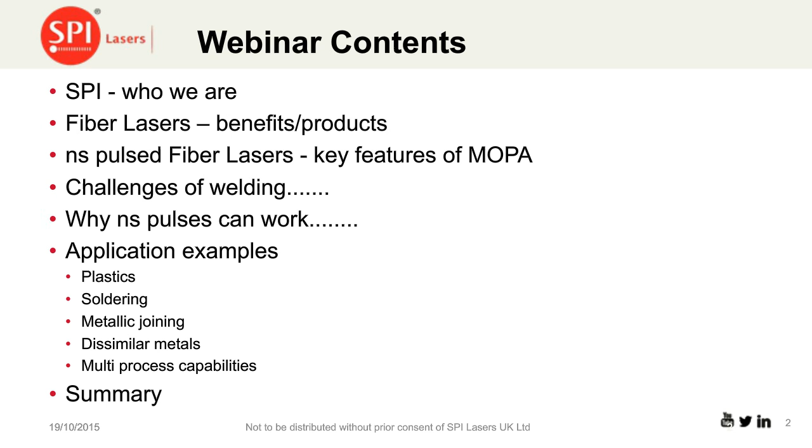And finally, we'll summarize the topic areas. A very quick summary of who we are: SPI Lasers is a manufacturer of fiber lasers based in the UK, and we basically make our own fiber. We're pretty much vertically integrated in most regards, and we have a global service and sales presence. We're very much involved in macro, micro, and marking applications, and pride ourselves on our applications know-how and expertise.

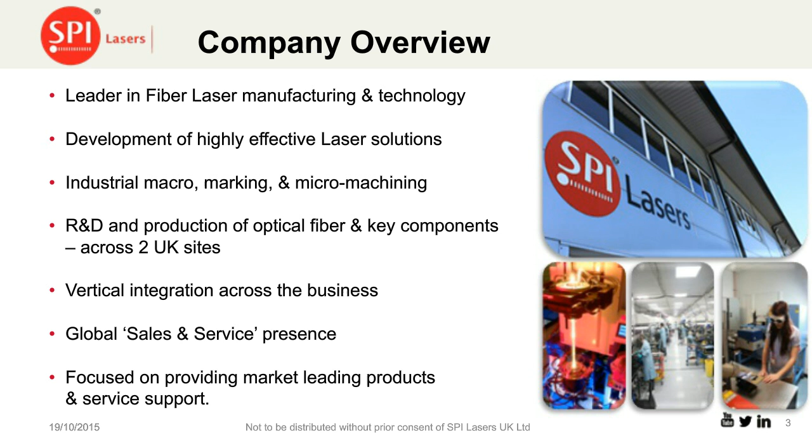In terms of our company history, just to put things into perspective, we are quite a relatively young company, formed effectively in 1999. We were originally a telecoms company that refocused into the industrial laser arena and decided to make fiber lasers just over 10 years ago, about 13 years ago. We were acquired by Trumpf in 2008, but run autonomously and independently from Trumpf.

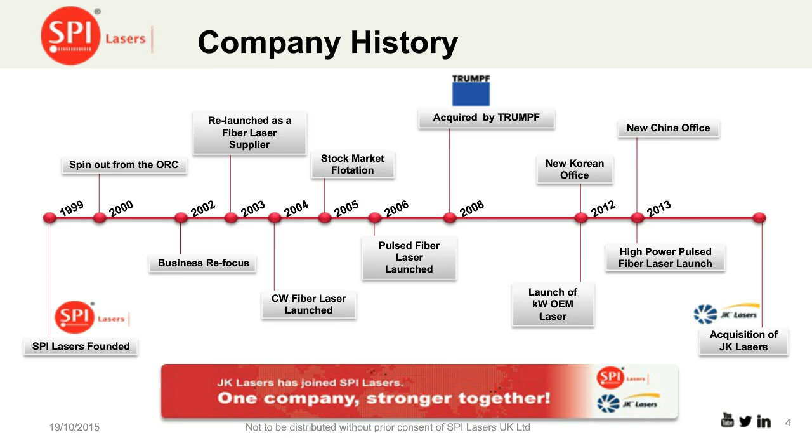More recently, we have acquired JK Lasers, that is now part of the SPI family. In terms of products, on the left here you'll see our pulsed fiber G4 products. We have then a whole host of CW products from 200 watts up to about 4 kilowatts, and those are the kinds of lasers that are more commonly known for their welding applications.

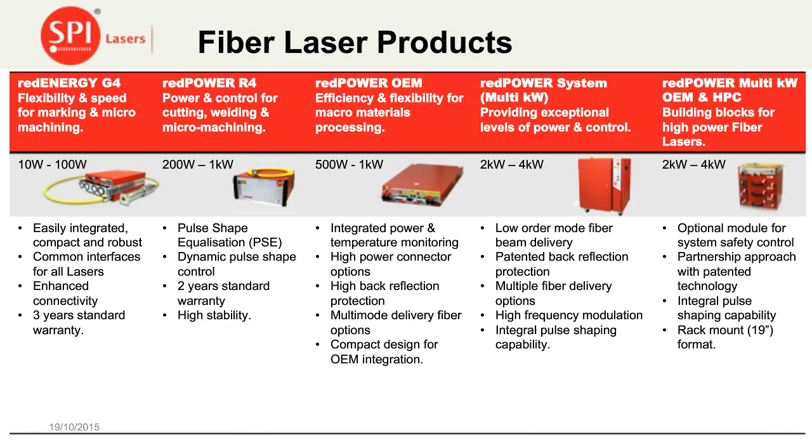So, I guess that's the kind of preamble, just to give you a bit of flavor for who we are. And now on to the bulk, in terms of joining materials. Basically, joining of materials is fundamental to manufacturing. It is one of the key processes that enables us to make things. And in fact, if we think about it, joining metallic materials is basically quite an old technology.

Welding dates back to 1885, with basically the invention of the electric arc. Before that, it was all forging, but that was when true welding basically came onto the scene. Key to this was effectively the development of local heating capability, and with that, the electric arc. I think it was Benardos and Olszewski, if I recall from my metallurgical background.

But the advent of laser technology in the 1960s produced effectively the perfect heat source. And that is what lasers are. Lasers are a very controllable heat source, a focusable heat source that you can turn on and off at will, and direct to the point of use. And that's what makes them so useful for a whole host of materials processing applications.

But also, more importantly, for the joining of materials, here we're talking about the importance of being able to generate high intensities. That's basically the high energy and high watts per square centimeter, high energy densities that are required to melt materials. We require high levels of stability because we basically want to have consistency in joints in the welding process. And also the controllability, being able to basically switch on and off at will.

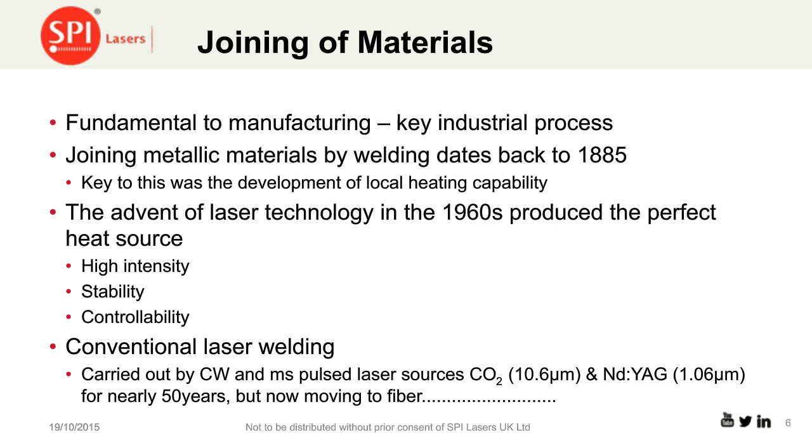In terms of the types of lasers being used, the basic type of laser is a CW laser, or continuous wave laser, where basically laser is measured by the power. Here you can actually see the top graph that shows that you get a stable output over time, and you can turn that on and off by modulation. So you can actually turn the laser on and off very rapidly, very controllably, to give energy to the workpiece at the point and time that you want.

More recently and more interestingly, perhaps the QCW type lasers, where these lasers are able to produce, for example, millisecond pulses with higher peak powers at reduced average powers than their continuous duty operation. So basically this gives us the ability to overcome material thresholds and punch in larger amounts of energy to create molten or larger molten pools that then resolidify to form pulsed type welds.

In some respects, some of the shorter pulse lasers are similar to that, but in fact what we see is even higher levels of peak powers with lower average powers. And that basically causes us a few challenges, because really we need to balance those out in order to be able to weld.

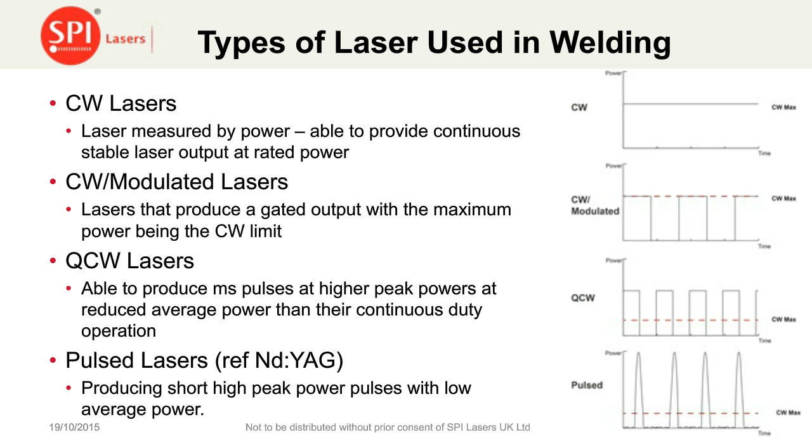So why fiber? Why is the fiber revolution rolling over the industrial landscape in terms of materials processing and welding? Well, it basically emits very close to the Nd:YAG or solid state wavelength at 1 micron, which is ideally suited to absorption by metallic materials.

We're able to tailor beam sources to generate high brightness or flat beam profiles through fiber and mode selection, so it basically gives you a lot of flexibility. These lasers offer high wall plug efficiency, reducing electrical and cooling requirements, and the complexity of integration.

So they're relatively easy to integrate into systems for generating industrial processes. They're sealed, flexible, require minimal space. There's very few internal free optics. It's all one piece effectively.

And so they are very adaptable in being able to deliver the energy to the workpiece, particularly through fiber delivery. And they offer the best stability in power, temporal beam response, and spatial profile mode for industrial lasers.

And I guess, if you follow the industrial revolution effectively, you'll see that the fiber lasers are the new kids on the block, well, 10 years now, but have really commanded a leading market position and adoption within industrial processes.

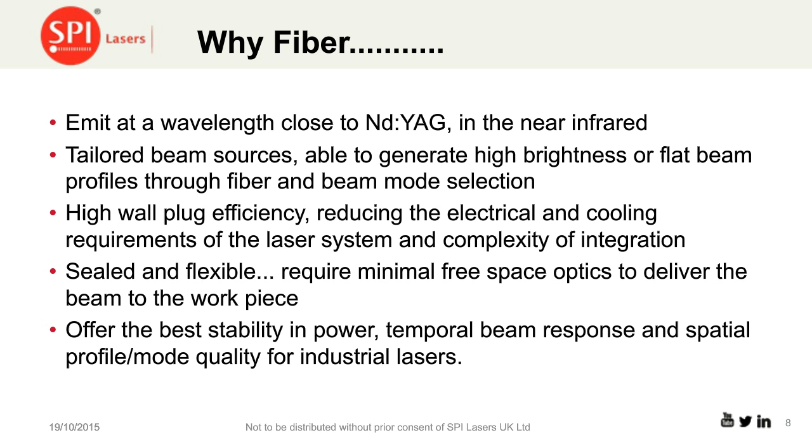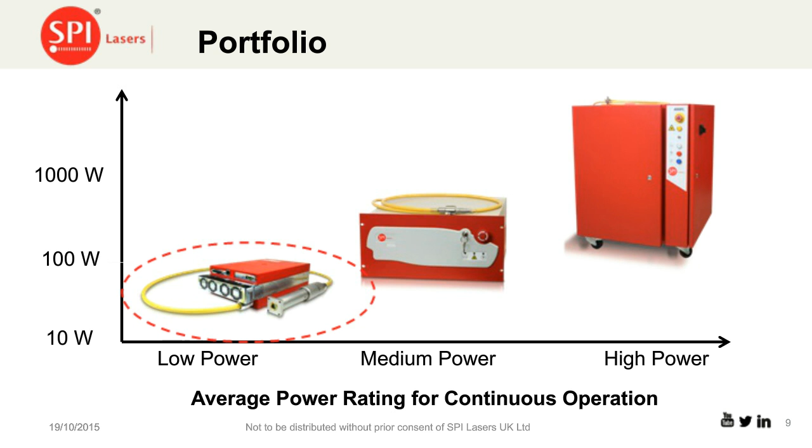And in terms of the challenges that we have for joining, the most important thing is the ability to control heat input, and I think that's why the lasers themselves are ideally suited. Then we have the questions of price versus performance.

Some of the high power laser sources are quite pricey. One of the things that fiber laser technology has done over the years is address the cost per watt, which is continuously coming down and enabling more opportunities to take on fiber laser or laser sources for materials processing and welding applications. Quality and repeatability, flexibility, and one of the challenges I specifically want to talk about is the joining of dissimilar metals.

And really what we want to address now is how these pulse laser sources can address those things above.

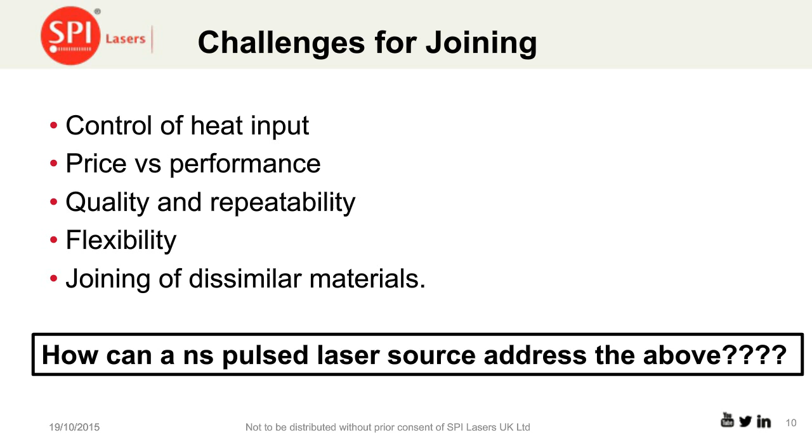In terms of the materials that we want to talk about, it's basically limited to relatively thin sections, less than 1 millimeter. With a 100-watt laser, there's some expectations that we need to set here, but we can do quite a lot of stuff with these kind of lasers.

And what I'd like to do is focus on lap and spot welding. We'll deal with stainless steel and copper in terms of just basic welding processes, and then explore the ability of these nanosecond lasers to weld bright metals and various combinations.

And interestingly here you can actually see in the picture lots of different materials, and all of those are basically welded to stainless steel buttons.

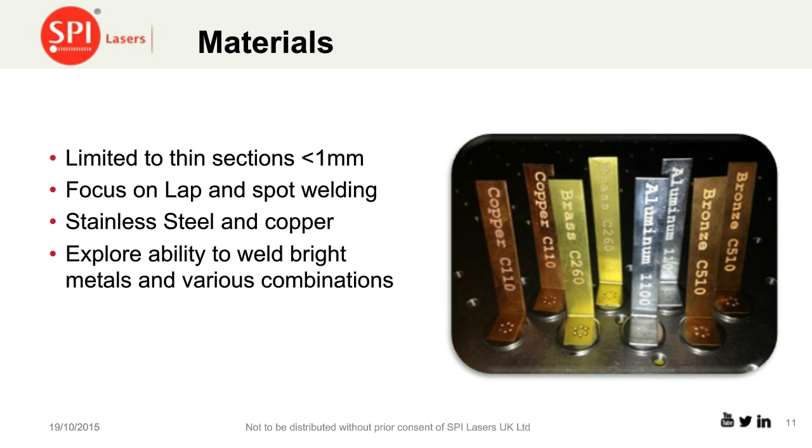In terms of these nanosecond pulse fiber lasers, they're little small things. They're like the size of a shoebox, no bigger. They're highly efficient, air-cooled, compact, monolithic in design, which basically means that it's one piece of glass.

So there's nothing to adjust, nothing to clean, which means they have a long, uninterrupted service life with no maintenance, no alignment, no cooling issues. It's basically fit and forget technology.

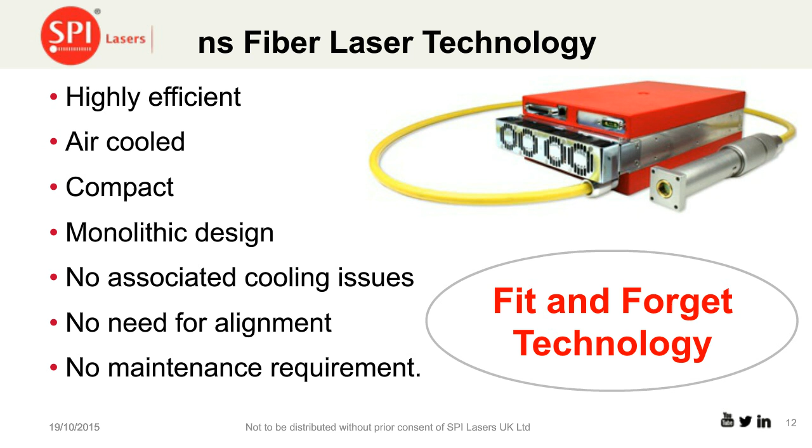Which is so different to many years ago with solid state technology or CO2s, where you almost needed a scientist to keep the lasers running, and also you needed someone skilled in maintenance to make sure that the performance was maintained. Those days are past. I think the advent of fiber lasers means that the reliability and repeatability is second to none now.

Many people may be aware of short pulse lasers and how they're generated. Most conventional pulse lasers use what is called a Q-switch, which is an energy storage device or technique that basically then discharges the energy available from the laser.

The lasers that we generate are based on a MOPA design, a master oscillator power amplifier design, that uses a semiconductor seed to actually generate the pulse, but we then amplify through a fiber train. This gives us some advantages and benefits in giving us greater control of capabilities of the generated pulses.

We have a characteristic fast rise, which is different to the Q-switch designs, which tend to be normal in terms of distribution. And that's basically good, as it's quick in overcoming processing thresholds.

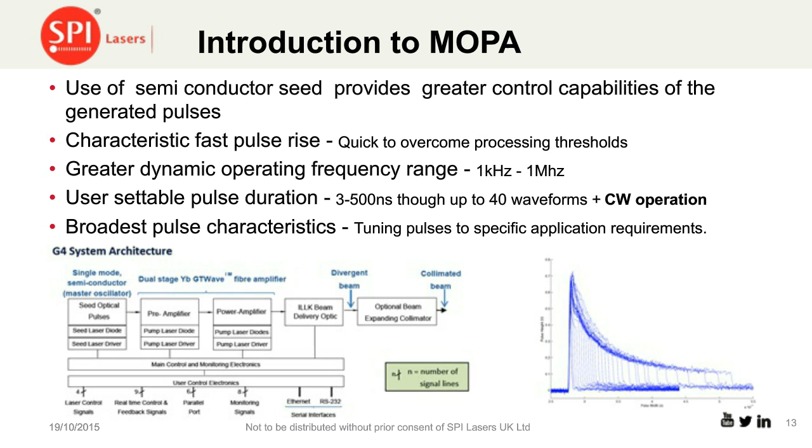And that's basically part of the application versatility that these lasers offer.

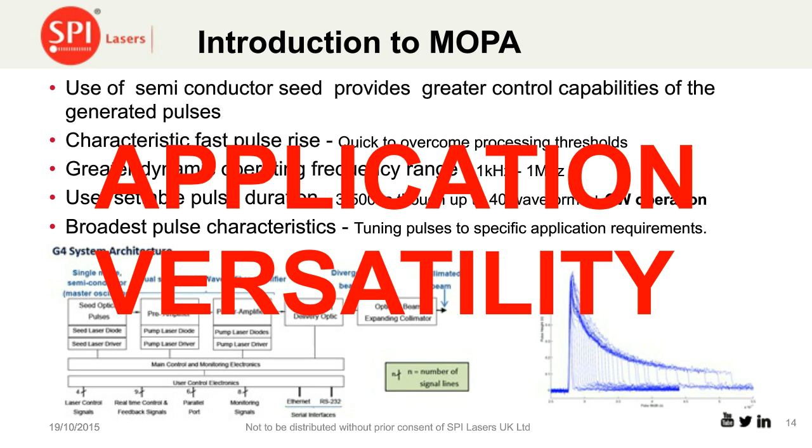In terms of parametric flexibility, we call it PulseTune. Basically, any of the waveforms, pulse shapes, and pulse durations we have can be used at any frequency. They are optimized for a given frequency to give maximum peak power, and can be operated below that pulse frequency, in which case the pulse energy remains constant and it's just the average power that will decay or decline. Or they can be operated at higher frequencies, up to 1 megahertz, where we manage to maintain the average power, but the peak power and the pulse energy per pulse decays and declines. This is basically a key differentiation to basic Q-switch technology.

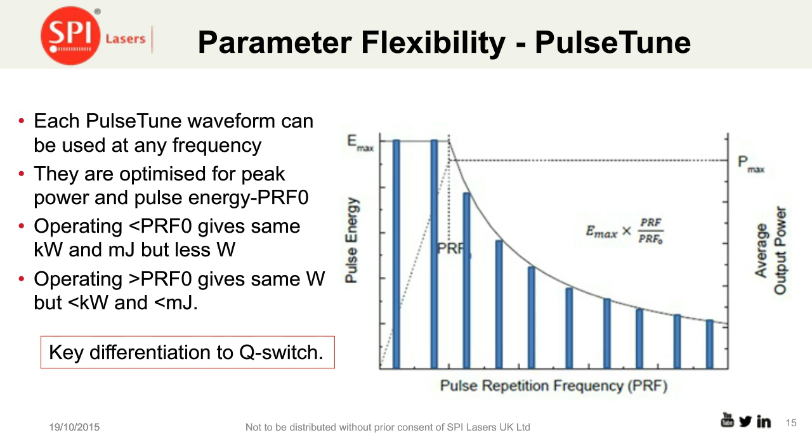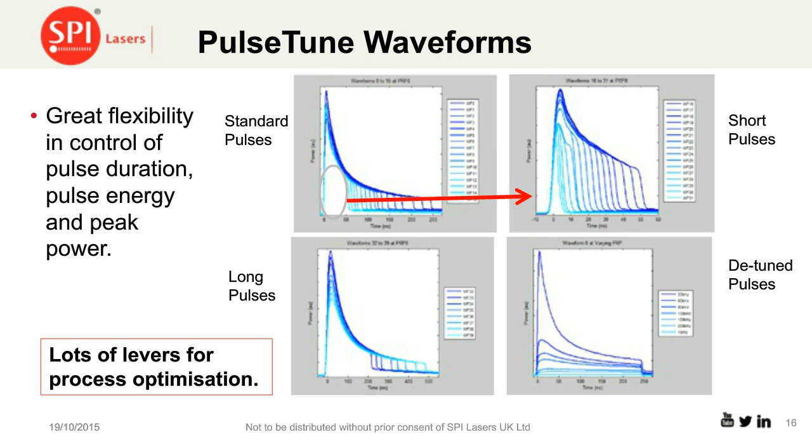What we can also do, bottom right, is detune the pulses. Each pulse is designed to operate at a critical frequency to give maximum peak power, the highest, sharpest pulse on that image. But if we operate at a higher frequency, the pulse energy decays or is reduced. The full width duration of the pulse remains constant, but we dull down the sharpness of the peak, which enables us to tune the laser to the application in question. That's actually quite important for welding, as I'm about to show you.

So I thought I'd share an advert we put out back in 2010, where we thought these were pretty much the most versatile types of micromachining and marking lasers. We knew they could cut, mark, clean, drill, do all these applications, but one thing I didn't have on there was welding. Back in 2010, nanosecond lasers were well known for their material removal processes, where the high peak powers were used to good effect, but not for welding. That's one of the things I want to move on to explore now.

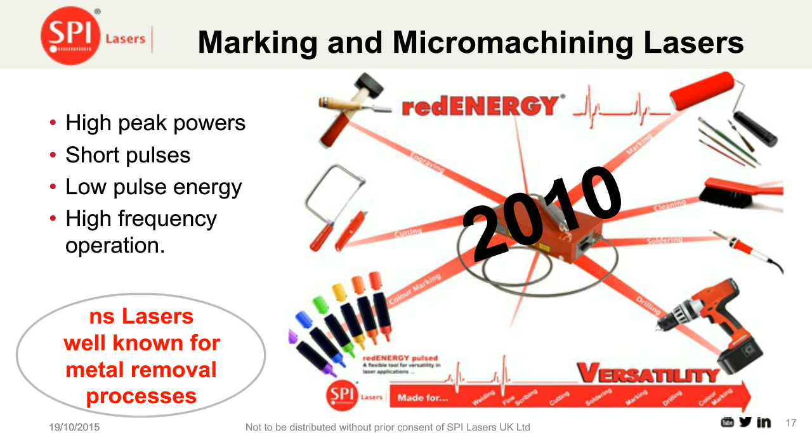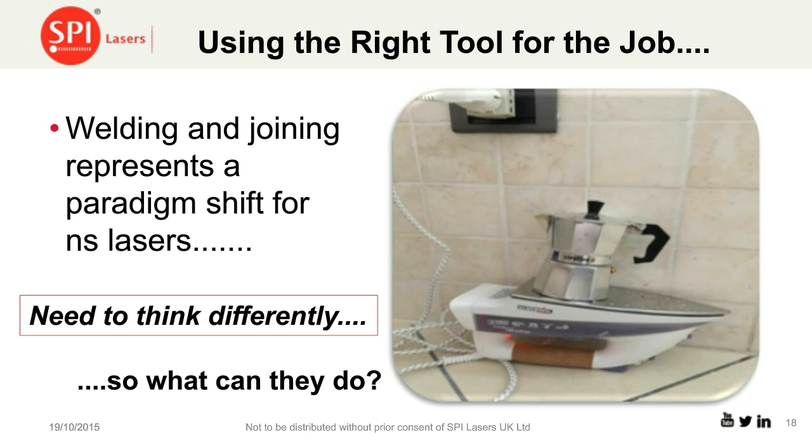So it's all about using the right tool for the job. Yes, you are seeing right, there's a coffee pot on an iron. What that really represents is a paradigm shift in terms of what we believe these lasers can do. It's thinking differently about how to use these lasers to perform welding tasks. So the question we have to ask ourselves is how they do that.

The systems themselves are relatively straightforward; most people will have come across them. Typically, nanosecond lasers are used with scanner-based technologies, which gives high flexibility and control. However, one of the big things for welding is sometimes the ability to shield and protect the weld from atmospheric contamination, which is very challenging with a scanner-based solution. You can use these lasers through fixed optic deliveries, through processing heads. It lowers the flexibility and control, but then, if needed, you can apply shielding gases.

These are just some typical data we would have with a 70-watt laser. We'd typically use it with a 163mm f-theta lens, giving about a 40-micron spot size, with a depth of field of somewhere around a millimeter. So it gives you a good operating window that you can actually use in terms of processing.

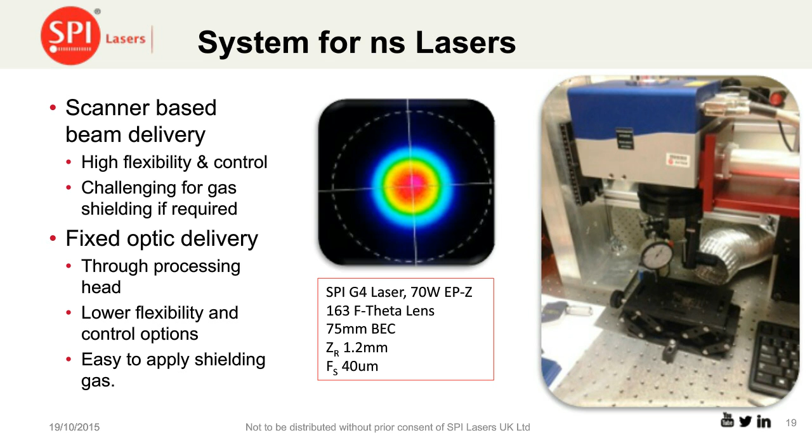The other important thing we need to be aware of is that we can detune these pulses. On the left-hand side, you'll see a long pulse duration with a very high peak, or a nail and a tail, as I'd describe it. If we increase the frequency, we change the P/E, or the peak power to energy ratio.

In the top graph we're showing the maximums, but we can minimize this by increasing the frequency for a given pulse duration, effectively getting the same watts but dramatically changing the shape of the pulses. The table on the right gives you a flavor for the different types of pulses that a single laser can generate.

For example, waveform 0, the top line there, is typically for a 70-watt laser optimized at 70 kilohertz. It's a 1 millijoule pulse. Because it's a MOPA pulsed laser, it has a high peak, so the full width half max tends to be quite short, but the actual full pulse duration is actually quite long.

We can play around with this as well. You can change the shape, change the peak power, change the pulse energy, change the full width half max, and also change the full pulse width. You've got a lot of levers that can be pulled in developing processes with these laser sources.

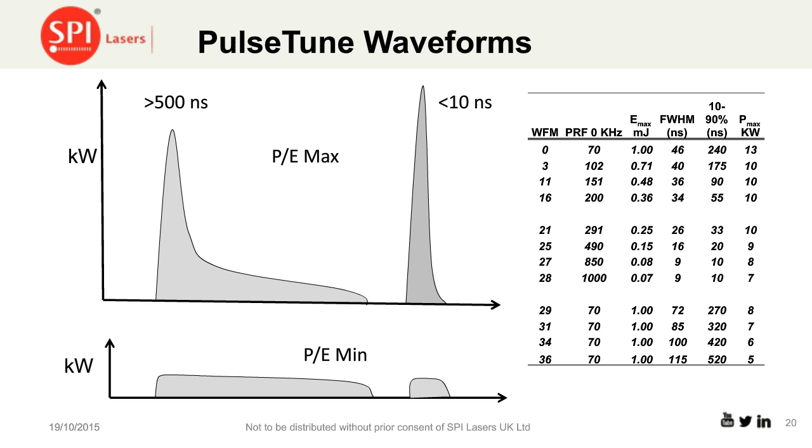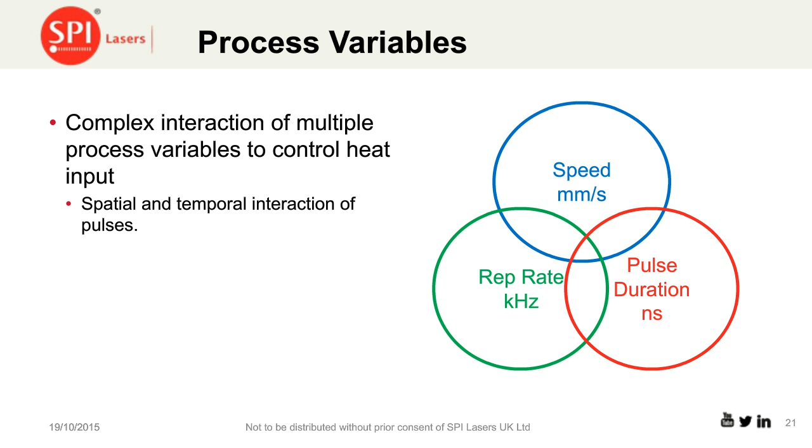In terms of process variables, I could spend an hour just talking about the complex interactions, because there are lots of things you can change that control the heat input. It's important to balance the spatial and temporal interactions of pulses. The levers you have at your disposal are things like speed, repetition rate, and pulse duration.

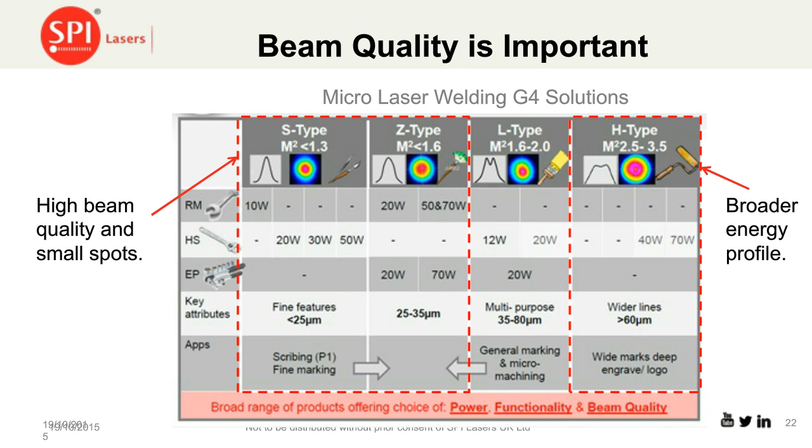At last we get onto the welding side. We'll start off with plastic welding. Traditionally this is a diode or CW application. The materials, for solid-state lasers, need to absorb at 1 micron.

Typically a fiber laser or even a nanosecond laser wouldn't be considered for these applications. There are easier ways to do this, possibly. But there are certain applications where spot size and depth of field are important considerations, and that's when the benefits of a fiber laser can come in.

The flexibility between using CW or high-frequency long pulses, which is basically a quasi-CW situation, gives you good opportunities for making very fine, intricate components with high control and repeatability of the end product. This is an example of an insulin dispenser made by my good friend Joe Lavotti at OK Industries. He adopted this laser source for this application because it gave him the flexibility he needed.

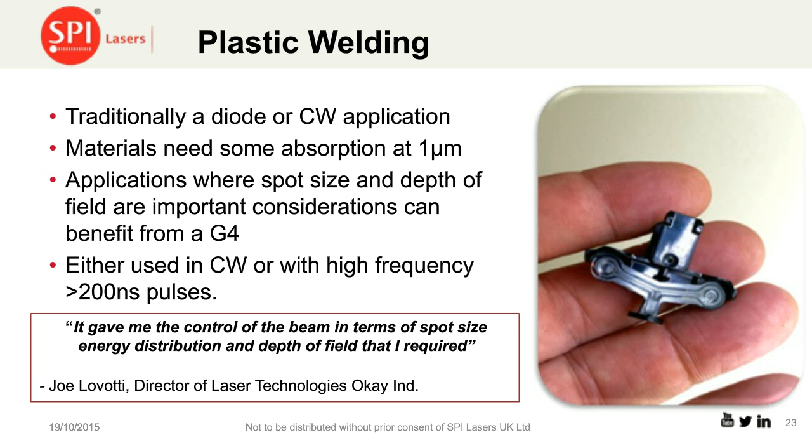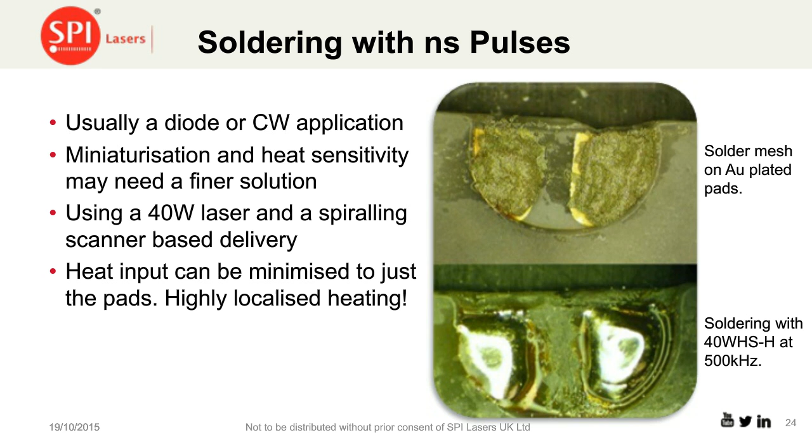We were able to just melt the solder materials, just melt the solder balls on the actual pads themselves. And you can actually see on the lower picture here that solder balls still on the pad but not in the spiral path are not even melted.

So, moving now on to welding of metallic materials using nanosecond pulses. As we've always said, we need to use the pulse waveforms and frequencies to tune the parameters, to move away from what I would call vaporization and melt ejection, to create an environment where you're generating a controlled melt.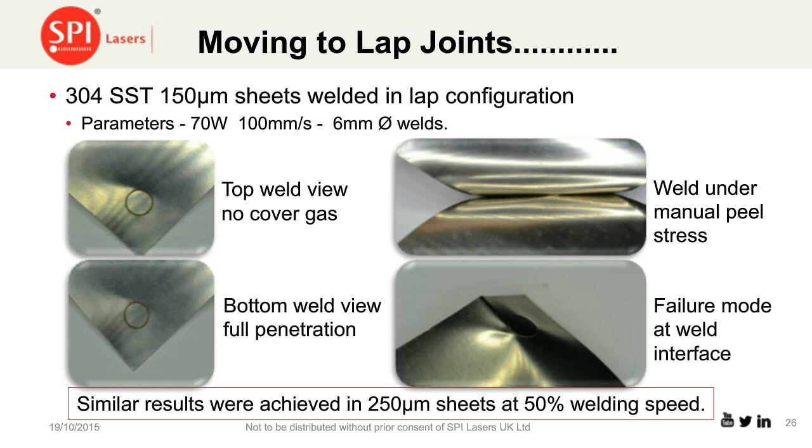One of the other things, well that's basically just linear processing. One of the other things being more commonly adopted within welding—it's not a new idea, because back at the Welding Institute in the 80s, or even late 70s, they were looking at wobbling laser beams to improve fit-up acceptability on welding. So it's not a new technique, but it's a standard feature on scanners. The ability to wobble the beam through very small radiuses or diameters lets you extend or broaden the weld and still create very good results.

And here, using this technique, we can show that we can generate bright welds through thickness of materials up to about 0.5 millimeter, which are bright and smooth, and again, single pass, no shield.

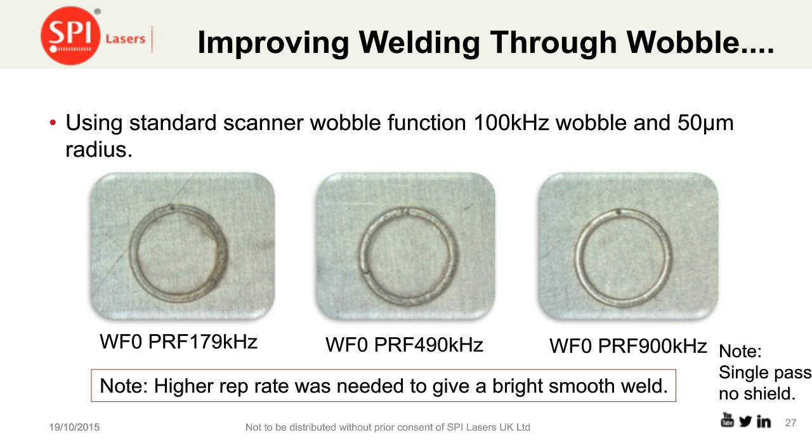We have been doing this for a number of years in terms of using these lasers for generating small parts—coil joining, wire joining. These are applications in industries such as the medical components industry, where we need to very much control the heat input.

Here is an example of a 50 micron coil where we're welding wire to wire with only a 20 watt pulse laser. And again, the issue here is being able to go to higher frequencies so that we can dull the sharpness of the peak but maintain the focusability and intensity of the energy to generate a good joint.

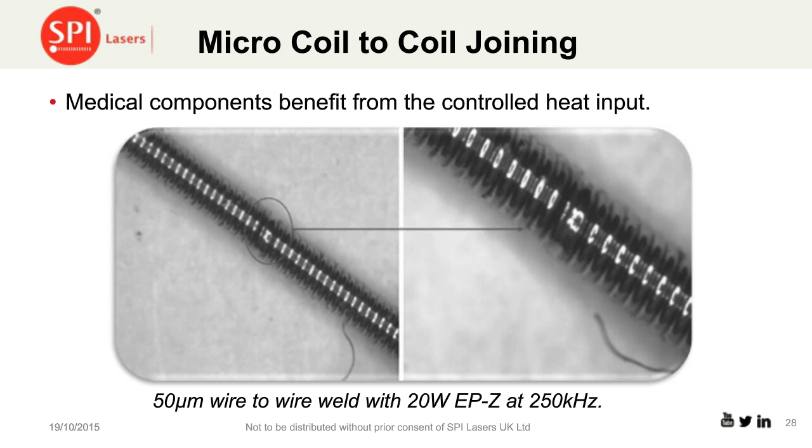We can move on, and there's a whole plethora of different kinds of applications where this greater precision can be achieved for wire-to-wire bonding. And basically, the choice of laser is dependent on the application.

So here are two examples I'd like to bring to your attention, where one, we're trying to weld or join a braid, a metallic braid, to a wire going through it. And here we need to do some gap bridging. So the ability to have a laser beam with a slightly higher M squared, or less beam quality to some people, a broader energy distribution, also comes with higher pulse energy. That's one of the trade-offs that being able to play around with modes, with fiber lasers, gives you.

We can bridge that gap. It produces a larger spot, but that's what's required when you're trying to bridge gaps.

The example on the right-hand side, however, is joining of two micro wires that are only 12.5 microns in diameter. This particular application is for a micro thermocouple. It's a similar application, but being able to hit that tip, you need a very fine spot, and this is actually achieved with a 20 watt laser, single-moded, truly single-moded, with an M squared of less than 1.3.

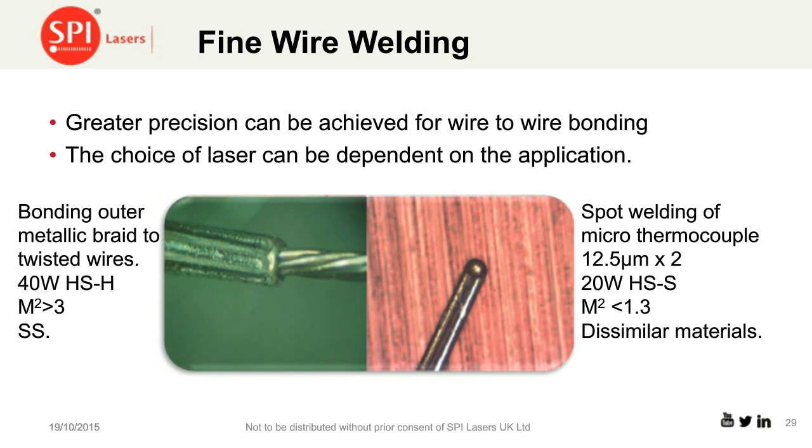Are these strong, though? That's one of the questions you will ask. And the answer is yeah, they produce pretty functional welds.

And here we've got an example of a seam that we've created in stainless steel. And pulling it apart, we're getting strengths in terms of this lap seam of about 250 pounds, which is quite reasonable.

There's many ways of actually generating welds. You can either just spiral and do a wobble weld, or you can create overlapping spot welds, where we're basically wobbling to create a spot itself. It gives similar results, but it's just a different technique that can be applied. This is very simple using scanner-based technologies, and all of these welds are using no shielding gas.

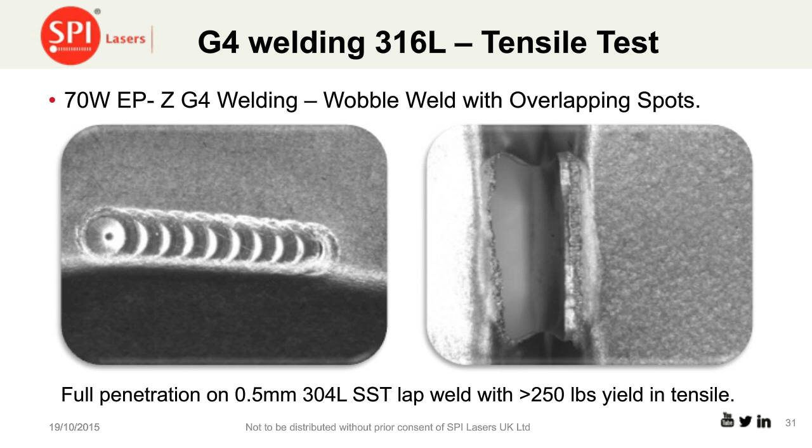Trepanning spot welding is one of the big things. We can actually control the size of the spot by trepanning it and control the heat input quite nicely. This is an application where we were welding 0.5 millimeter stainless steel, and we were getting up to 7 lap welds per second using just a 70 watt laser.

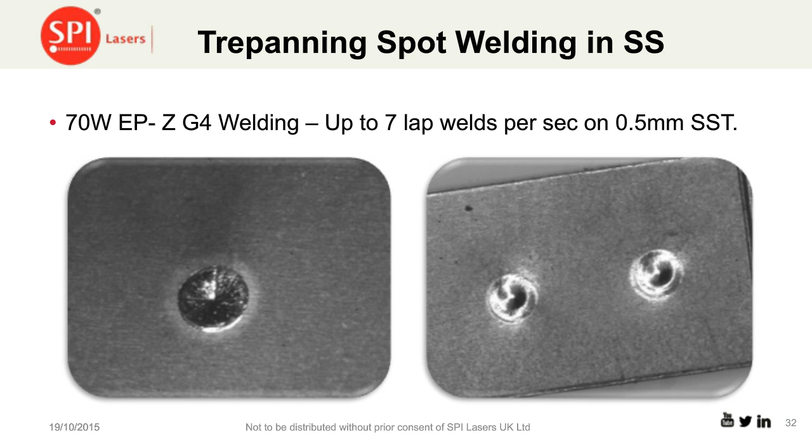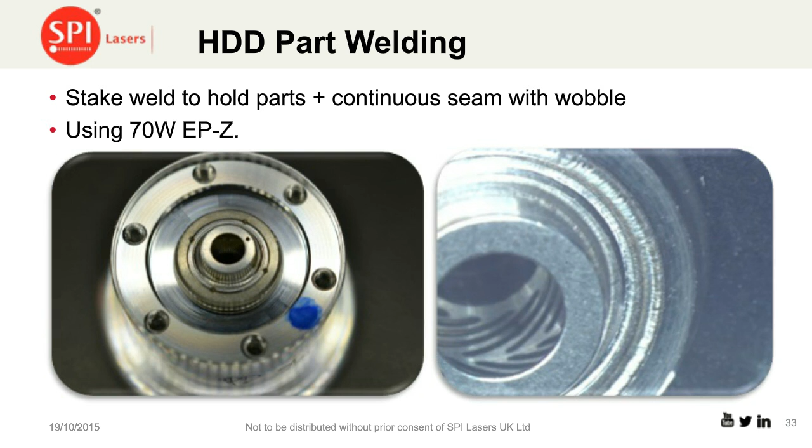In terms of components, these are the kind of things that we sometimes see. More conventionally or originally these were done with solid-state YAG lasers, but these parts are ideally suited to the type of welds that can be achieved using nanosecond lasers. It's basically stainless steels, and you've got to be quick to see this.

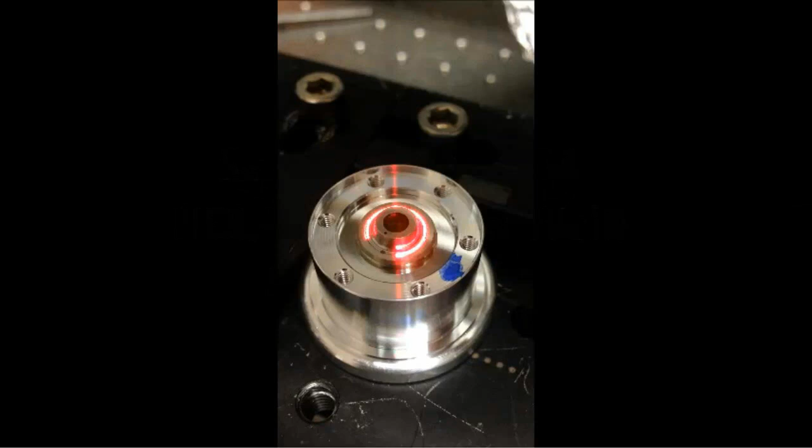We're going to just hopefully go for a little video clip. It's always a tense moment when you start loading video into webinars. Let's see if it works. Oh well, for some reason that doesn't seem to want to work.

Unfortunately, it was very quick because basically the video would have shown 4 spots and then a seam that's done in just over a second, or under a second, I think it is.

Ah, here we go. Slight delay, but so basically this is the staking, so doing 4 spot welds. There you go, blink and miss it. It's very, very quick. And this is basically a 70-watt nanosecond pulse fiber laser welding this hub to cap. Again, be careful, you blink and then miss it - it literally is very, very quick. And that's generating a weld using a wobble that's producing about a couple of 100 micron depth in terms of weld and a 600 micron width weld, which is basically what the customer in this particular instance was looking for.

When we were developing this, what's interesting is one of our applications engineers is an expert in welding, and he actually lives in California. So he was doing this kind of work, and I asked him what else he could weld. He just sent me this photograph, which represents a total cornucopia of dissimilar welding - it's a real smorgasbord of welding.

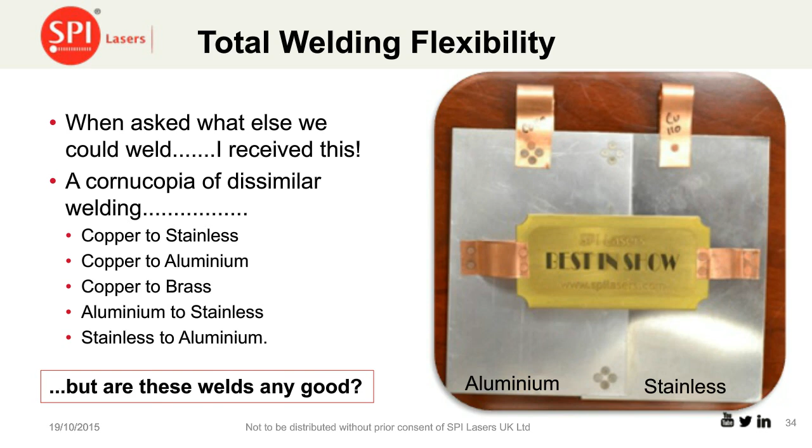So they've got examples of copper to stainless steel, copper to aluminium, copper to brass, aluminium to stainless, and stainless steel to aluminium. So quite obviously, my question, my retort to Daniel was: but are these welds any good? To which he basically replied with the following photograph, which I thought spoke volumes.

So there's some interest here. In actual fact, building on from that, we've done a lot of work that looks at the challenges of welding dissimilar metals. The challenges are the high reflectivity in the near infrared, dissimilar melting temperature, brittle intermetallic structures, and different cooling rates. And the key here is to be able to create mechanical joints independent of these challenges with these 1 micron nanosecond pulses.

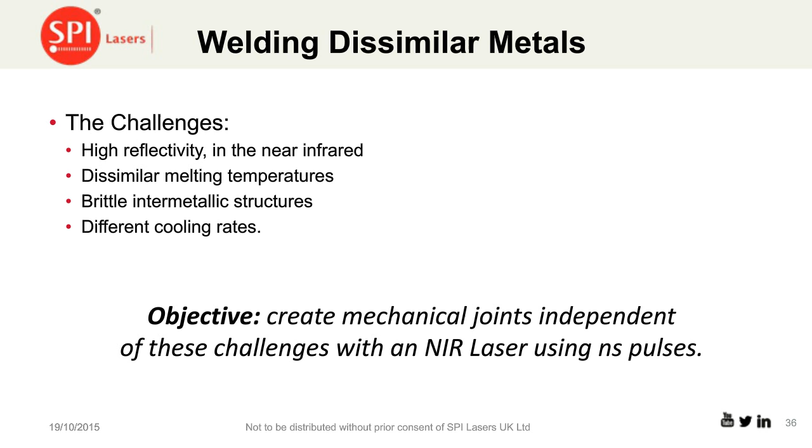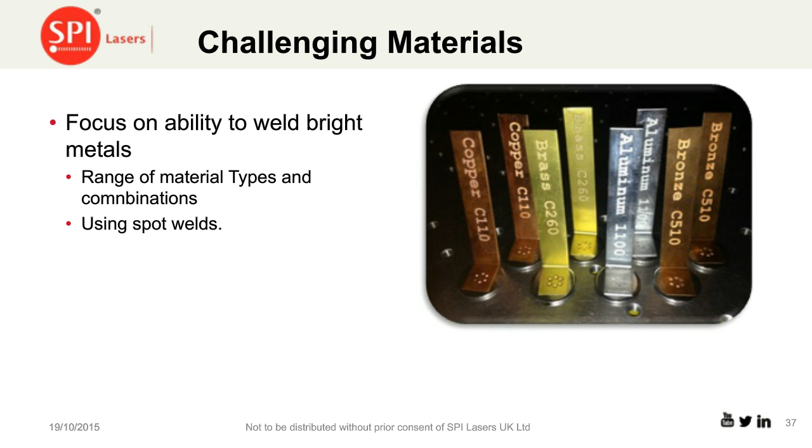Our focus is the ability to weld these bright metals in a range of material types and combinations. Our focus has primarily been on spot welds, although we do have some seam work as well. When we talk about a spot weld, it's very different to some of the other spot welds you may have experienced, because what we do is create these by spirals, like little scales, where we can spiral outwards or inwards and create a nugget effectively that creates a spot. This is basically made up of millions of pulses, and it creates a very good joint with the material.

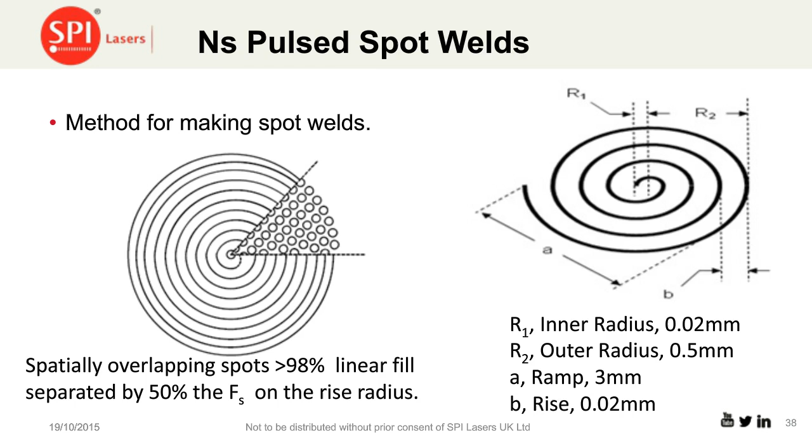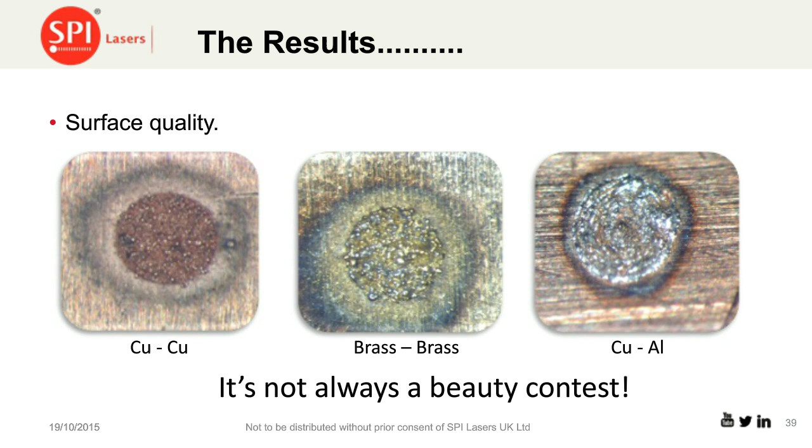The results are quite interesting because, as it says here, it's not always a beauty contest. The results look different compared to conventional welding with large millisecond pulses, but as you'll see shortly, they are quite functional. They do the job. The structure of the visual impact is slightly different, but they have benefits in terms of speed and joining capabilities between materials.

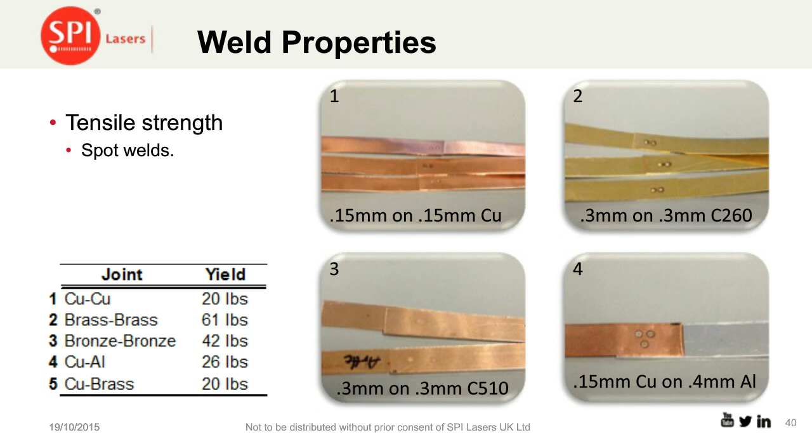What's interesting is these spot welds are actually metallurgically very exciting. Being a metallurgist by my first degree, when I first saw this it really intrigued me, because these spot welds do not show the characteristic forms of conventional pulse spot welds, but resemble more closely multi-staking. Here you can see we're punching into the material through the copper into the aluminium below, and we're actually melting the aluminium, which gets sucked back through the hole that's just been punched to make a solid material meshing between the two materials. That's quite interesting.

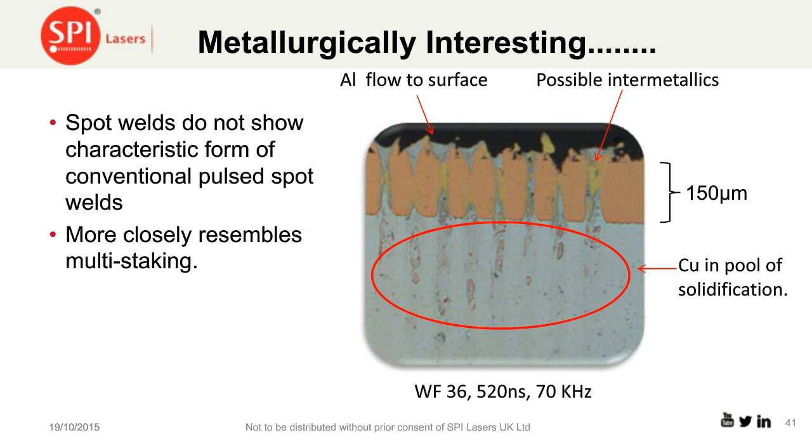What's interesting to see is that copper is actually injected effectively into the aluminium as well. Here we cannot see the kind of intermetallics that you would normally see at the interfaces. There may be a few examples of some intermetallics, but in the interface zone there does not appear to be any. So when we break them, we see that all the welds fail in the heat affected zone and the base materials, and the nuggets themselves remain.

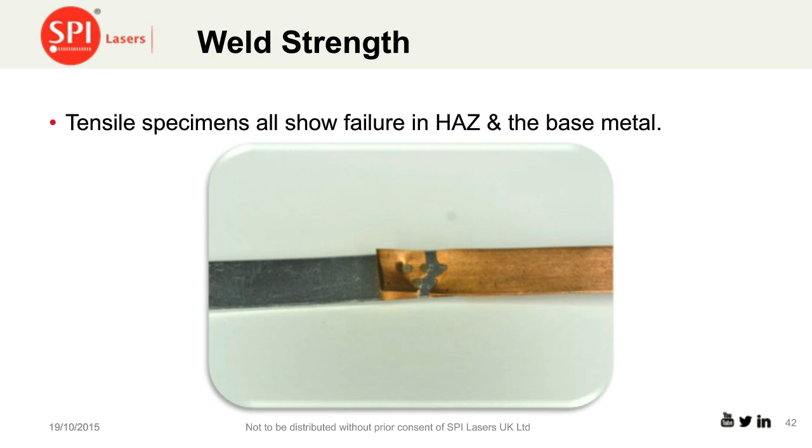We can actually improve the characteristics by what we'd call cosmetic passes, reprocessing the weld with a secondary pass. That's work in progress, but it's showing promise at being able to improve the strength and capability of these welds.

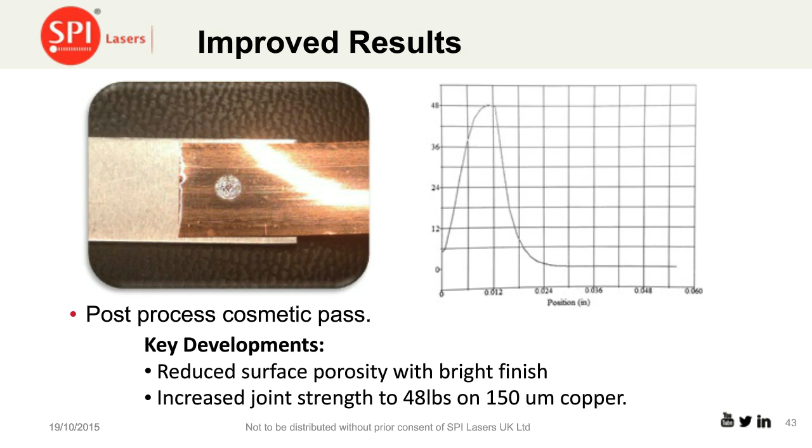We've actually found some very exotic and more challenging joints can be made. I have to thank my good colleague Dr. Geoff Shannon of Amada Miyachi, who let me use this picture where they've used one of our 20-watt single-mode lasers to join 100-micron foil stainless steel to titanium. I'm not quite sure why you'd want to join stainless steel to titanium, but I suspect metallurgically it must be quite a challenge. His statement is that the flexibility these laser sources give him enables him to make such joints.

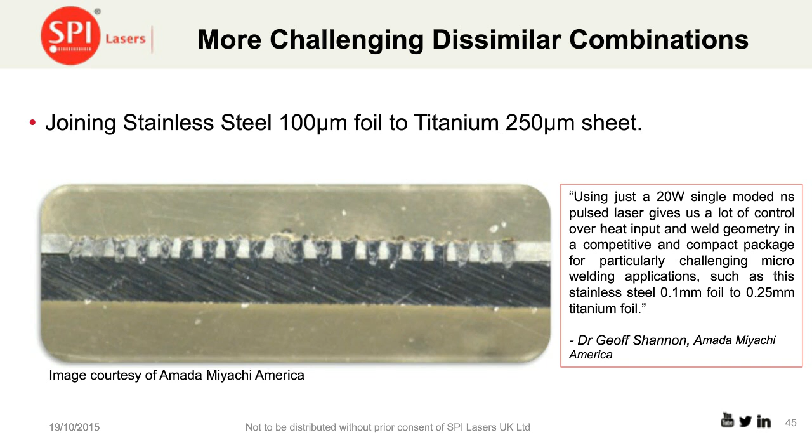In terms of applications, we're looking at fine welding as a growing market, particularly for the push for miniaturization - things like battery foils, cells, medical devices, sensors, and thermocouples are good examples of that.

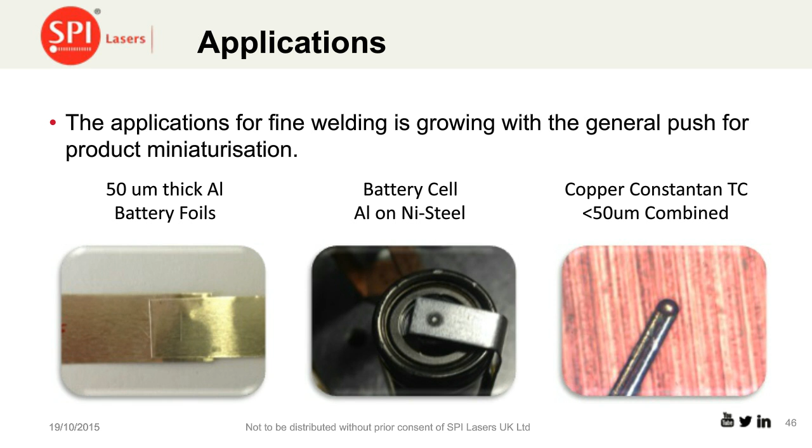Let's not forget these lasers are capable of doing other things. This is an interesting application my colleagues at Trumpf developed, where they're structuring metal and then bonding plastic onto it, using the ablative and engraving capabilities of the nanosecond pulses. You just put a piece of thermoplastic on there, then switch to CW, pass over it to remelt it, and it flows into the grooves, again giving you a strong joint.

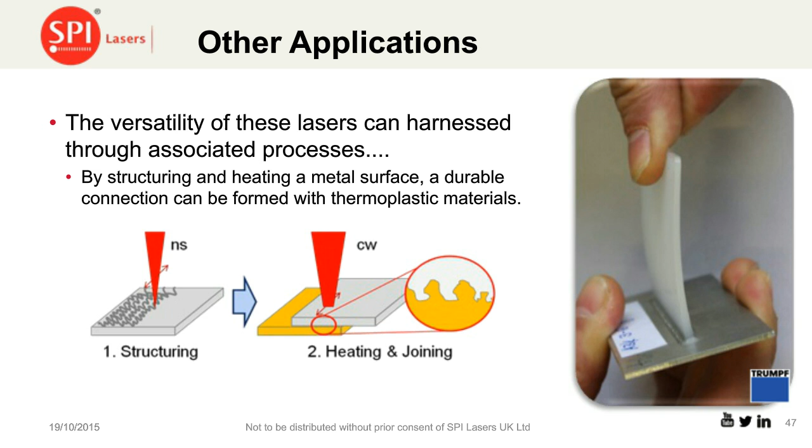Other applications include cleaning with nanosecond pulses. The high peak power short pulses can be very good at selectively removing material during pre-processing, for example the selective removal of zinc pre-welding.

This is just an interesting example - here you've got a piston head sent to us from someone in India who wanted us to try and remove the carbon coating on it. What's interesting is with these nanosecond pulses we can actually remove totally all the carburization, all the hydrocarbon, all this kind of debris or gunk that's been on these piston heads, down to the metal, without removing the machining marks.

You can still see the machining marks. We're very selective in what we can do. And that gives us the flexibility.

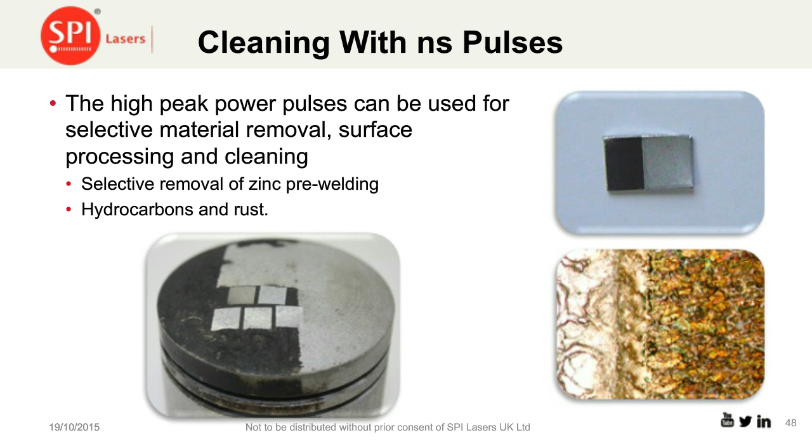Let's not forget that these can cut, weld, mark, and do all those other applications, which gives benefits in terms of combining processes, particularly in applications where you want to do combination processing such as cutting, welding, then marking. These can be done, particularly on micro devices, small devices, with nanosecond pulse lasers.

In conclusion, what we have here is something that provides efficiency, low power, low cost solution, capable of welding thin section materials. We have a lot of quality to offer in terms of reliability, repeatability, and control of these laser sources, and their utility is good, being able to deal with bright and dissimilar metal combinations. So I hope you'll agree with me that nanosecond lasers are not just micro machining lasers, they are micro welding potential laser sources.

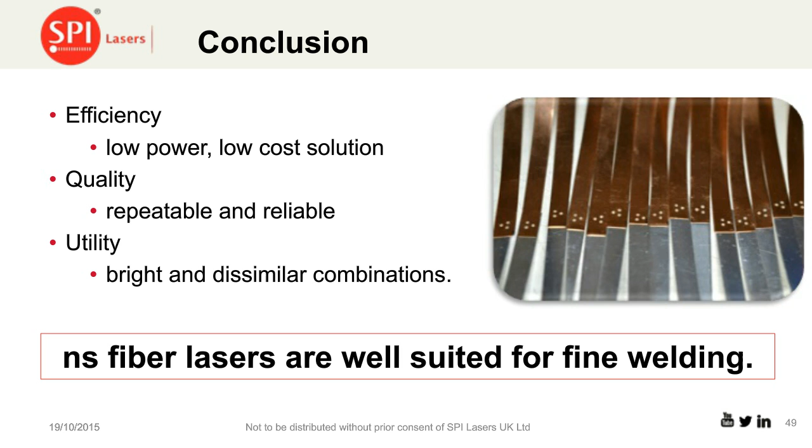Two slides to go, guys, so we're almost there.

So literally, I just wanted to finish off on the fact that we have different types of lasers, and it's quite important to match the laser to the kind of application that you have, whether you want precision heat input, dealing with bright metals and depth of penetration, or whether you're dealing with materials that are better off with a slightly broader energy distribution. We have different laser sources that would be optimized for different types of applications.

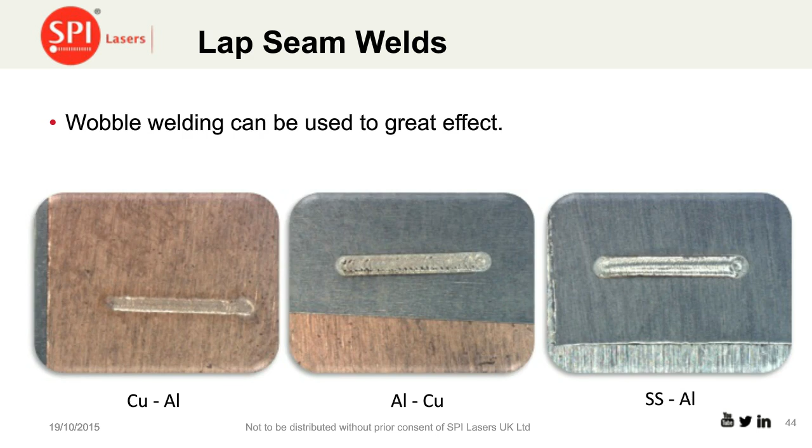You mentioned that no shield gas or cover gases were needed for many of the applications. Is this true in titanium welding?

Welding thin foils on the order of 10 to 20 micrometers, what would you suggest? High frequency and low pulse duration, or CW?

We've had very, very good results with high frequency, long nanosecond pulses. One of the last slides basically suggested that a broader energy distribution actually benefits those kind of applications, so you don't want to use too sharp a tool for joining those very, very thin foils.

Jack, can you weld through a glass fixture to the parts that are held together underneath? I suspect you will be able to. One of the things that glass does is basically transmit the wavelength of light in question. And if you have foil or material underneath it, it absorbs and it will melt. So I haven't tried it as such, but I would have thought it would be possible to do something like that.